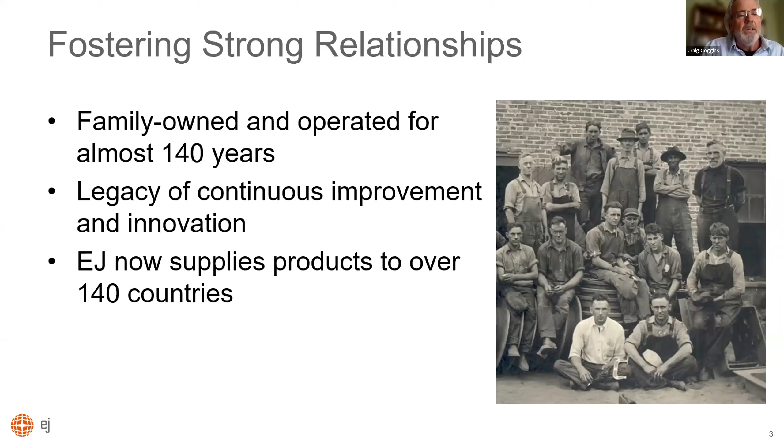Our new Syracuse fabrication plant, just north of Syracuse, is where Brian Stites' office is. They focus primarily on fabrication of aluminum access hatches and a lot of custom underground utility vaults for big utility customers. We really specialize in customization of those types of products. We also do a lot of steel frames and grates, depending on the state you're from. In Connecticut, for example, all your inlet structures are welded steel fabricated frames and grates. A lot of other states still have those requirements, so we do that type of work at the Syracuse fabrication plant too.

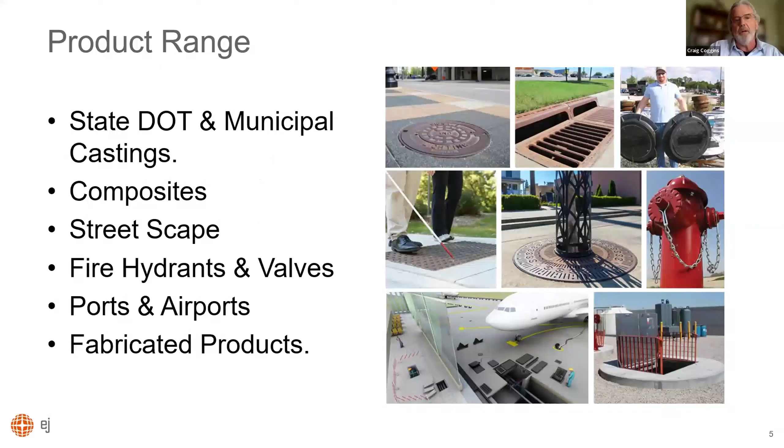Okay, so jumping right into it. Oops, let me go back here.

So the remainder of the presentation is going to be talking about innovative access solutions for municipal infrastructure. I think one of the things our leadership has done a pretty good job of is recognizing the importance of getting out there in the field with our customers and finding out what it's like to use the products that we make. In doing so, we've learned a lot. We start seeing where people struggle to use the types of things our industry produces. We see other kinds of applications out there that really need a solution rather than just a traditional manhole frame and cover. So these are the things we try to take back to our product development and come up with items to address those things.

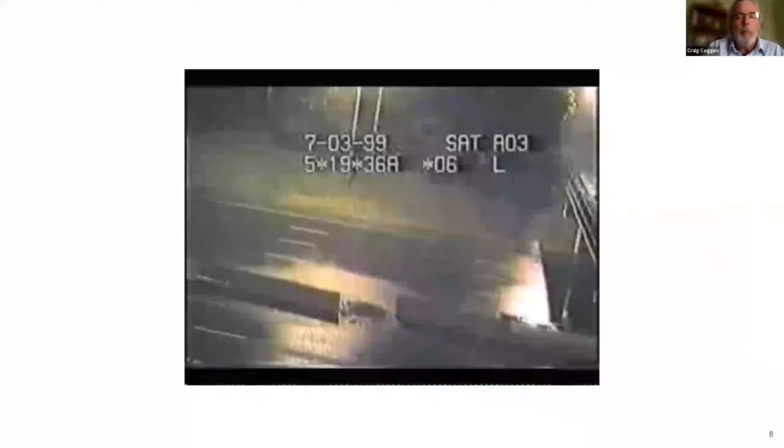Typically, whenever I start talking about this face to face with a municipality, I can usually catch one or two people in the room - they start shaking their head like they know exactly where they have the problem. So I should have clicked this a second ago while I was talking, but I wanted to...

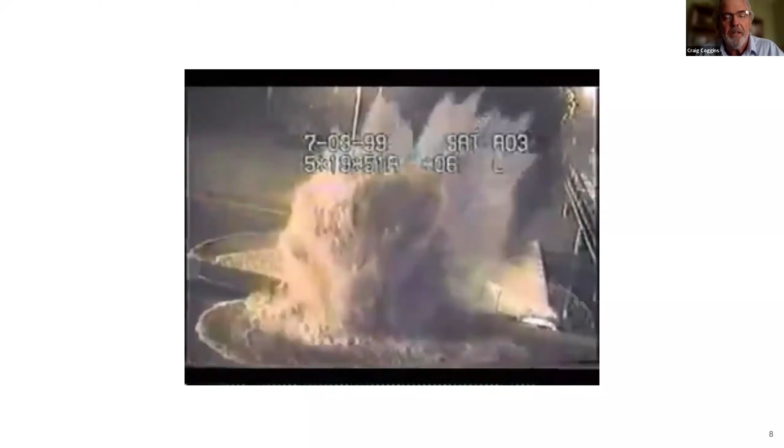give a good example here of what happens when you do have those types of events. You notice there's a manhole structure right there in the center of these four lanes. And this is what can happen.

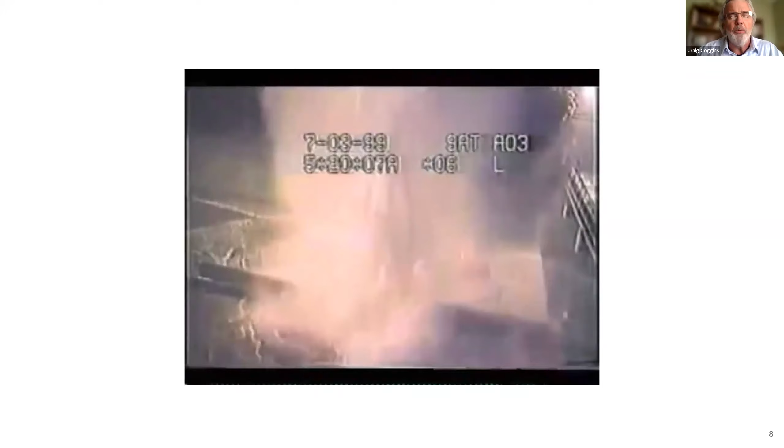And the reason I'm letting it go here is because I want you to see, laying right there in front of that pickup truck, you can get a sense of just how big that manhole cover is. I know we make some pretty large ones - just looking at that, I'm guessing it's probably like a 4-foot clear opening, so the manhole cover itself is probably 50, 52 inches in diameter.

And this video just keeps going because it's not done yet. This thing will erupt again shortly after the gentleman in the pickup truck gets out there, probably inspecting the damage, if anything, in the front of his truck.

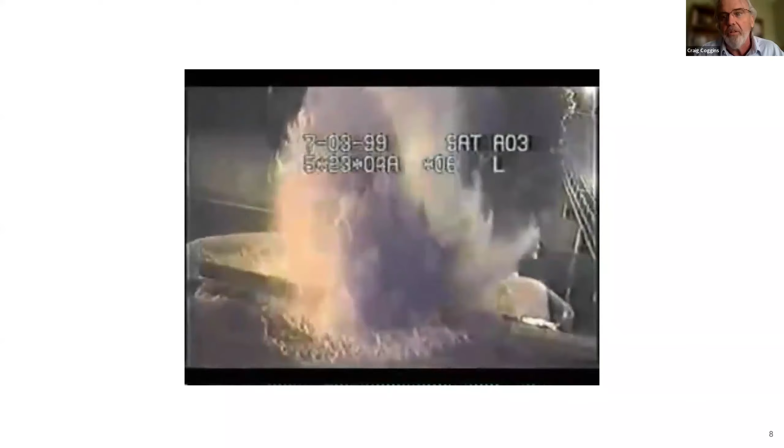Now, one thing I like to point out here - obviously this is a problem because now you've got a manhole cover right in the middle of one of the lanes. But thankfully in this scenario, the actual structure itself is located in between those two Jersey barriers.

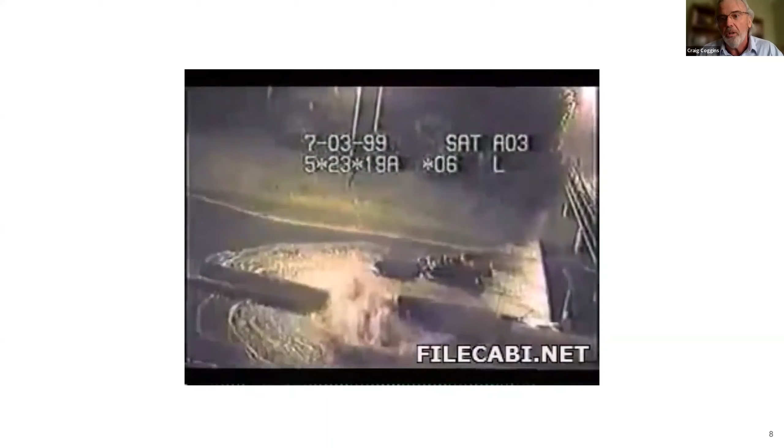Most cases, that's not what's going on. Those manholes are usually right in a wheel lane. You saw a tanker truck go down the road there a few seconds ago. You can imagine if you've got a 48-inch diameter gaping hole in the middle of your road and along comes a tanker truck, and he's not seeing that. So it is certainly a problem.

It doesn't take a whole lot of pressure. You'd be surprised what it takes to start to dislodge a manhole cover.

So then you've got the issue of an open hole in the middle of your roadway, which could cause vehicular damage, maybe some bodily injury or worse. So it could be a problem, not to mention the additional cost of now you've got to send a crew out there to locate the manhole cover and put it back in place.

So one of the things that we've developed for those specific applications is a storm surge assembly where you have a manhole cover anchored at the backside of the frame on a hinge point. And then you've got a large arm that hangs down into the structure. So if you do have that type of event which would typically dislodge a cover, it will push this cover open to, I think it's like 15 to 17 degrees.

It will allow that energy to dissipate. But then once that subsides, the cover is just going to shut right back down into the frame where it's supposed to be. So you're not left with a hole in the middle of the road, or other potential catastrophes there.

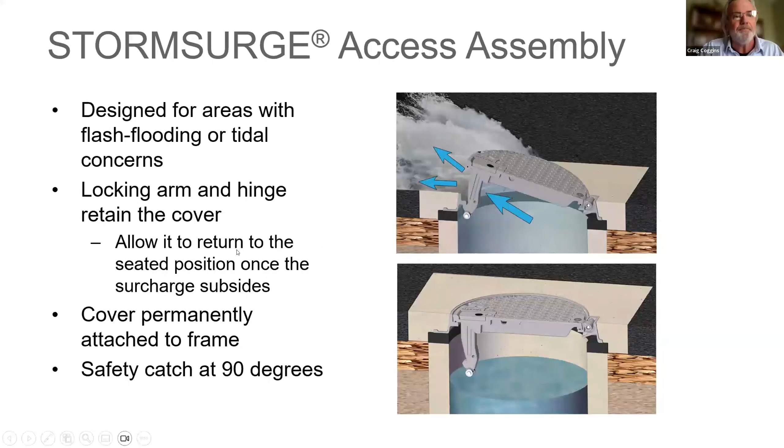So one of the things I like to do is, I get done showing one particular design that allows water out, and then I jump to something else where you don't want anything getting out or in. So we'll talk about watertight applications for a few minutes here.

And what our engineering group wanted to do was design something that would take a tremendous amount of internal pressure, because there are a lot of applications out there that could potentially be in floodplains. There's some low-lying areas, especially nowadays with potential effects of climate change. People along the coast are worried about it, a lot of the low-lying areas are starting to see more flooding.

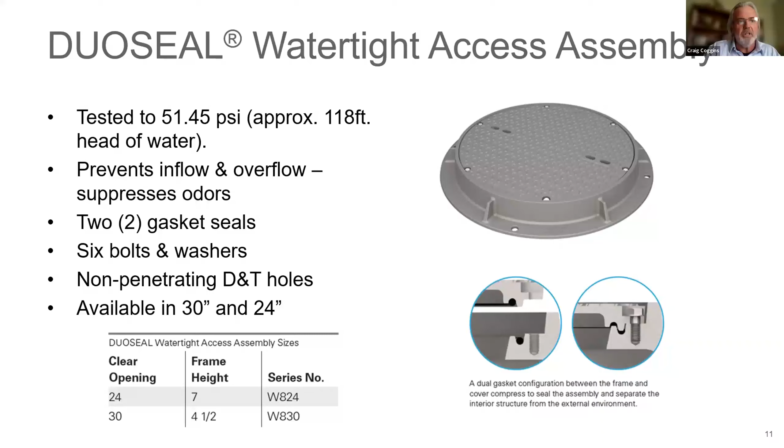So one of the things that we did, this is just an internal list, not an industry standard, but we wanted to be able to put a number to certain levels as we're having a conversation with an engineer, customer, or distributor about what exactly they're looking for. So they came up with these 8 levels of watertight. Level 1 is just a traditional gasketed manhole frame and cover, with a compressed gasket, either just the weight of the cover or a bolted cover. No testing has been done there, no pressure rating. So pretty much anything with a gasket and typically a bolted cover, we'll call that a level 1.

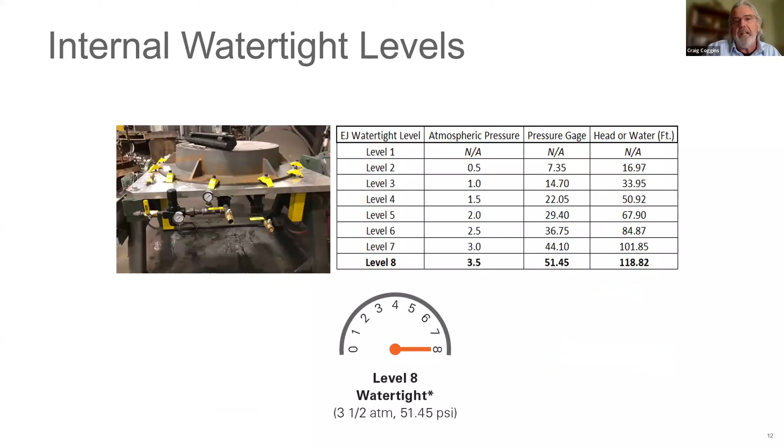So they wanted to develop something at the top of that list, and that's exactly what this Duo Seal is designed to withstand - that level 8, almost 51.5 PSI, which equates to a little over 118-foot head of water. That's quite extensive - I'm not sure when that's going to happen, maybe after all the polar ice caps melt - but the bottom line is we have something that will address pretty much any application that's out there.

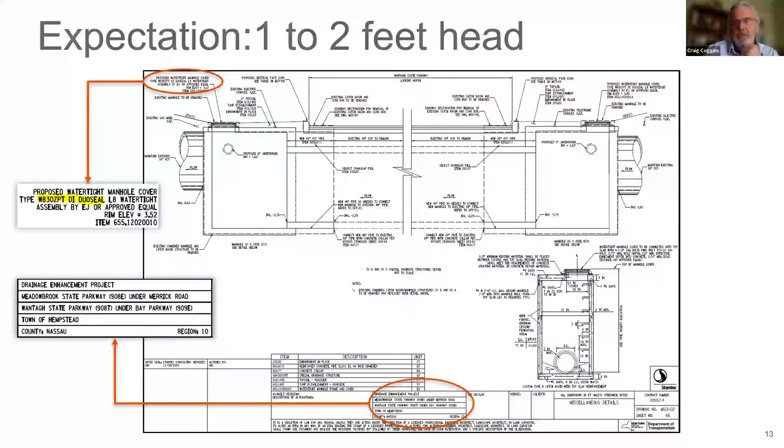This is just a picture real quick. I worked with an engineer out of New York City who specified this product on a job down in Region 10, on Long Island. We actually got a note back from that engineer asking if we can go through the process and get this DOT approved, because they anticipate a lot more applications like this, especially down there on Long Island, along the coast, and probably up along the FDR. I'm sure Hurricane Sandy is always going to be fresh in the minds of a lot of people out there for quite some time.

So I did submit that to the DOT. We do have New York State DOT approval on that particular item. One of the things I included - I worked with some industry partners over at ConSeal, because the question kept coming up: how do you seal this thing to the structure? So using a couple of their products, we put together this recommended specification for sealing the frame to the concrete structure, which is good for a maximum of 10 PSI pressure, equating to 23-foot head of water. And then I've got a note in there that anything beyond that, up to the design pressure of that Duo Seal, which is 51.5 PSI, an alternate method should be developed.

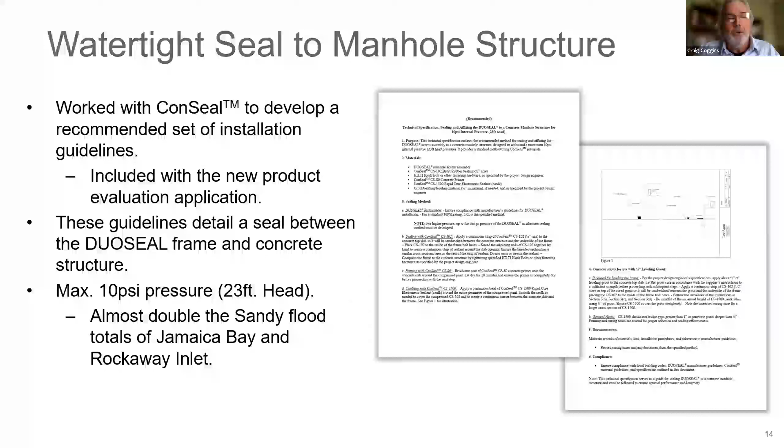But when are you going to need that? Like I said, this is good for 23-foot head of water. So just out of curiosity, I did some Googling - I've mentioned Hurricane Sandy a couple of times, and I wanted to know what were the worst hit municipalities during that catastrophe. As you can see, the bottom two there, Jamaica Bay and Rockaway Inlet, both saw almost 12 feet of water. That's a lot of water. But my point is, we've got an access assembly designed to take 118-foot head of water, and a recommended sealing method to the concrete structure good for almost twice what those two municipalities saw during Hurricane Sandy.

That is the whole spiel on the watertight side of it. I don't know if anybody had any questions so far - anything I need to stop to address? Are we doing okay? Nothing in the chat yet. Okay, alright, I'll just move on here.

Okay, continuing on talking about addressing products for resilient municipal infrastructure. We hear a lot of talk about sustainability nowadays. Every time I go to an APWA show or similar type of show, there's always a talk or presentation about different people trying to develop new asphalt systems, more sustainable asphalts. And one of the issues that could possibly help the sustainability of an asphalt road surface is your access points.

To the infrastructure. I would assume anybody with a driver's license can understand this picture. Depending on where you're at, your typical routes to and from work or the grocery store, you probably know which ones you're going to swerve around because it's just not good for your car. And this is a problem that has gone on for years and years.

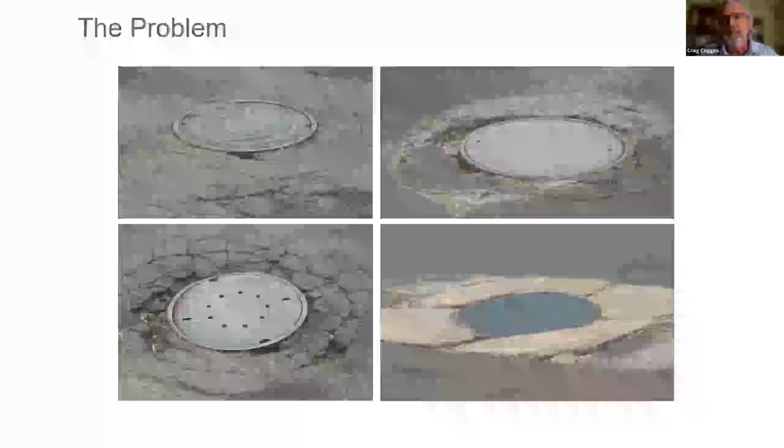If you think about what we've been doing for the past 100 or so, 120 years, wherever you have a manhole that you have to get into and you need an access point, historically we've taken a cast iron frame and cover and you set it on top of that structure, and then you pave up to it. Now you've got two separate entities: your cast iron access point in the middle of your road, and your paved road surface paved up to it. But once that casting is set, that's pretty much where it stays.

But then what happens when winter comes and temperature gets really cold? Your asphalt starts to move. You've got freeze-thaw cycles. That asphalt will heave and settle. But if that iron isn't moving, you can see what kind of problems typically start going on around that structure.

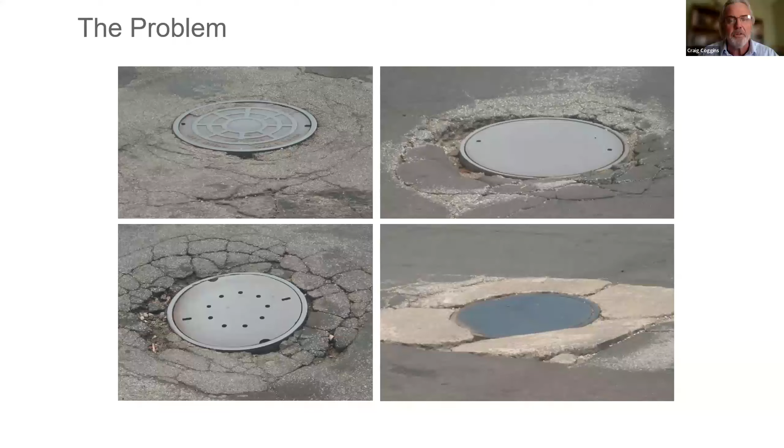So now you've got something to address the pitch of the road, the cross slope, and then the upper frame and cover actually gets embedded into the paved road surface. So now you've got your access point that's an integral part of your paved road surface. And when you do have those freeze-thaw cycles, that upper frame and cover, as part of your road, will move with it. And that will protect your road surface.

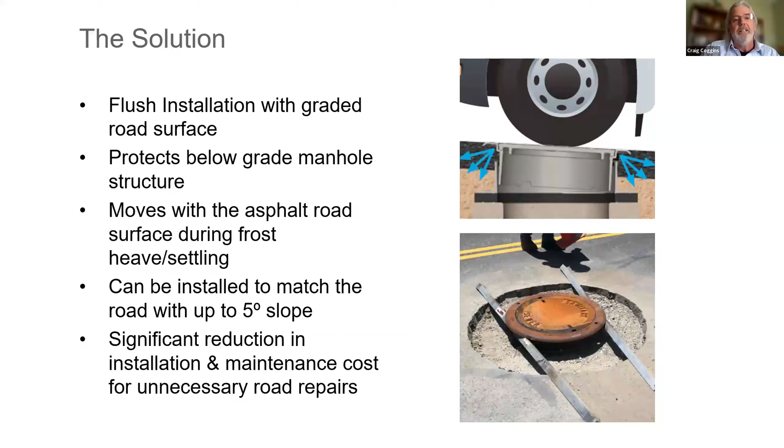So I'm just going to move on here because I've got a little video coming up. You'll get to hear a couple of municipal people from upstate New York talking about what they think about it. I could sit here and talk about the stuff all day long, but it's nice to hear what somebody else thinks about it that's been using it. So I'll just go ahead and jump to that.

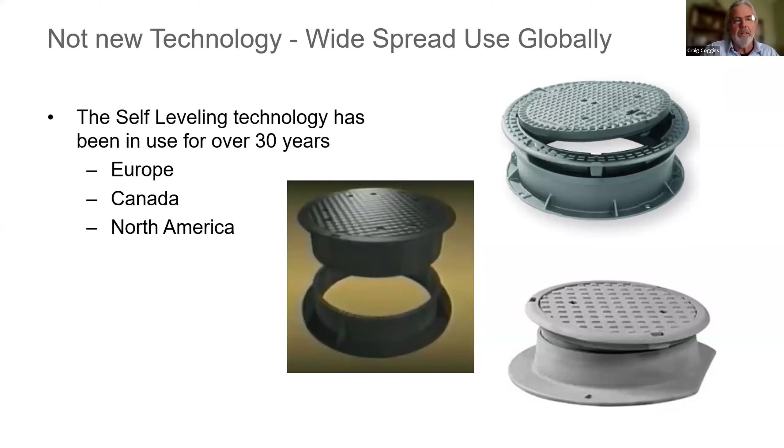I did want to mention though, it's not new technology. Not too many people want to be the first horse out of the gate with something new and fancy, but this type of technology has been around for quite a few years, used over in Europe quite a bit. This is pretty much all they use up in Canada, I believe. I think those two lower pictures are both Canadian units. The lower right picture is one that was typically used all through upstate New York, but it was sourced from Canada over the years. So probably the past 20 years or so, we've finally developed our own, and it's seen a lot of success.

Upgrade your streets with... sorry, I failed to give you more lead-in, but anyway, here's the video. I'll just let this play so you can get a better sense of what exactly it is, what it does, and some of the results there.

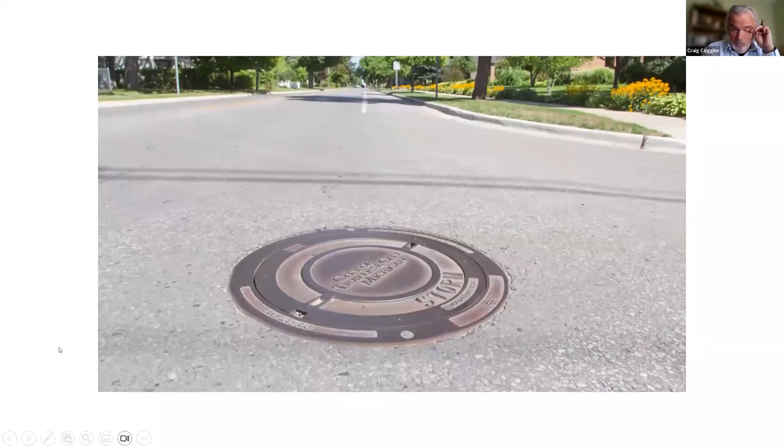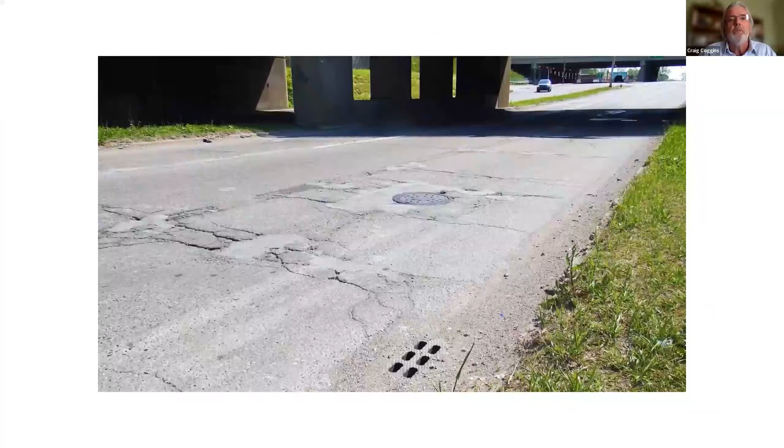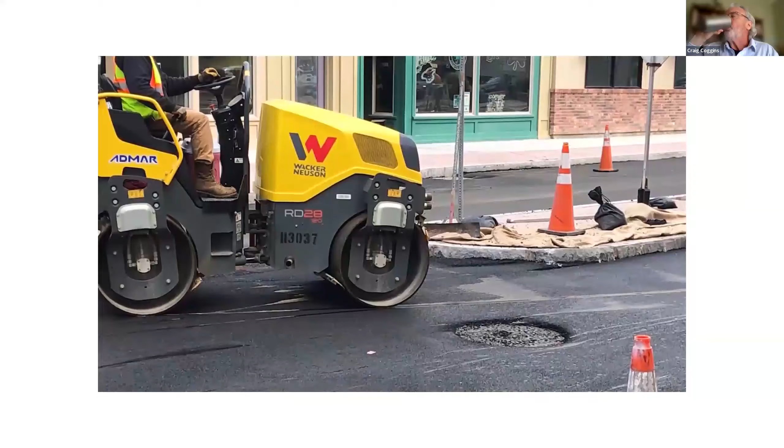The self-level access assembly, engineered to keep manholes flush with the pavement, so your roads stay smooth. If a manhole frame is not properly installed and adjusted, it can result in sunk and broken asphalt or concrete around the manhole. Traditional methods of resetting or replacing manhole assemblies can be costly due to labor, materials, and equipment. With the freeze-thaw cycles, we were getting deterioration of the asphalt in the surrounding area. It was very time-consuming to install the traditional manholes for repairs. Adjusted manholes might look good from the start, but could crumble if the frame is not properly supported. The mortar underneath them will give out from the salt water. The salt in wintertime gets in there and dissolves them, makes them tilt, and they sink in the ground.

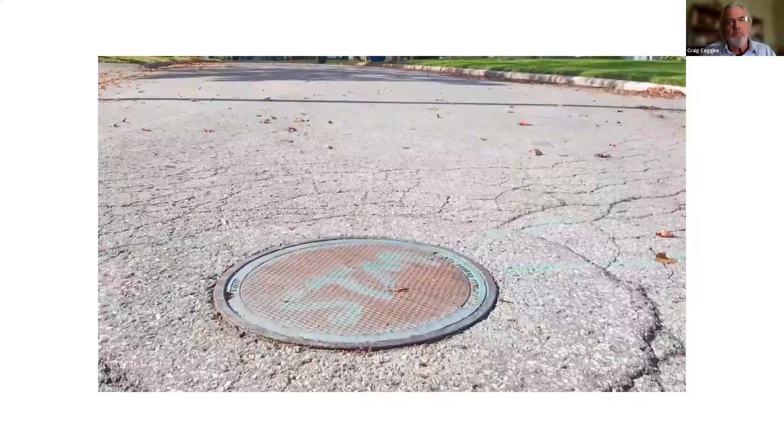The self-level access assembly reduces site deterioration around manholes caused by frost heave, uplift, and settling, which improves drivability to meet smooth street initiatives. The two-frame assembly moves to remain perfectly aligned with the finished road surface.

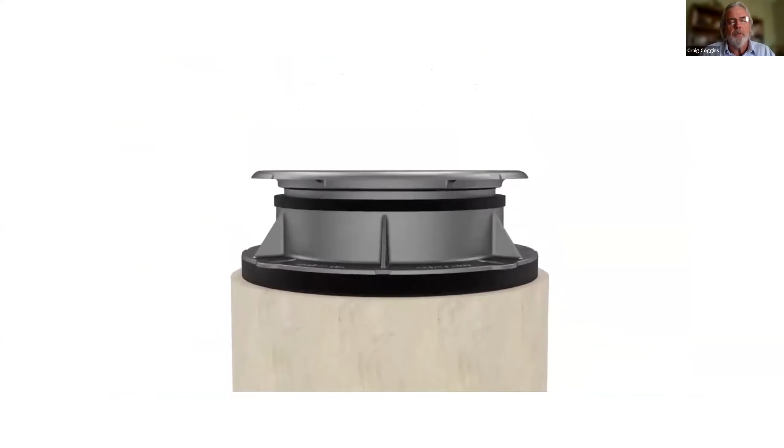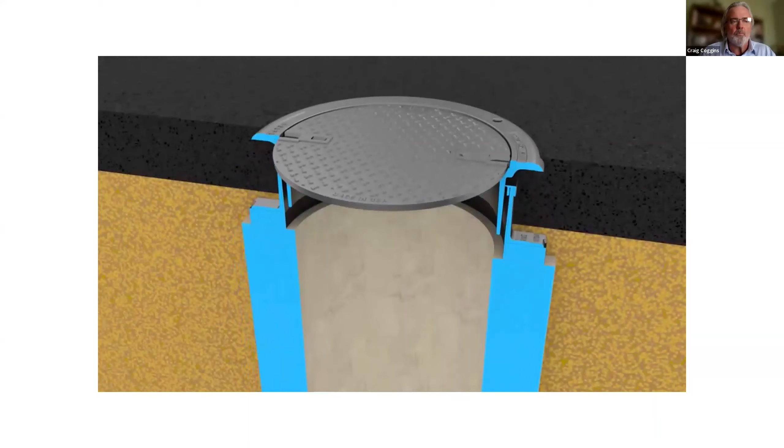It features a guide frame that facilitates self-centering and keeps the upper frame centered over the manhole structure. The upper frame is supported by and moves with the road surface. This floating effect helps prevent road damage and protects the infrastructure underground by dispersing traffic vibrations and shock throughout the road surface, rather than into the structure below.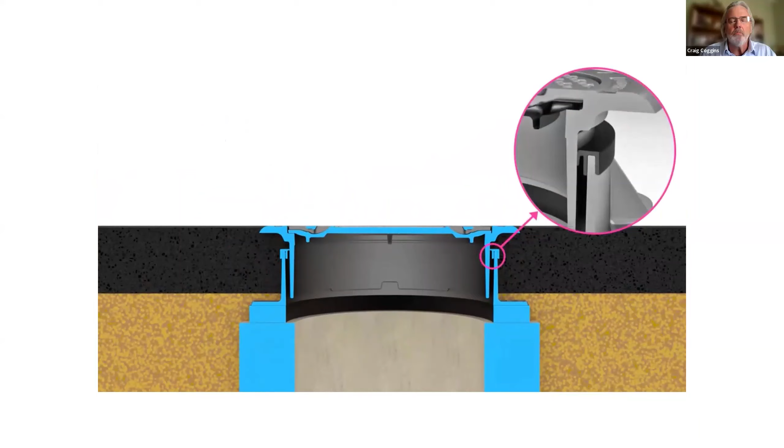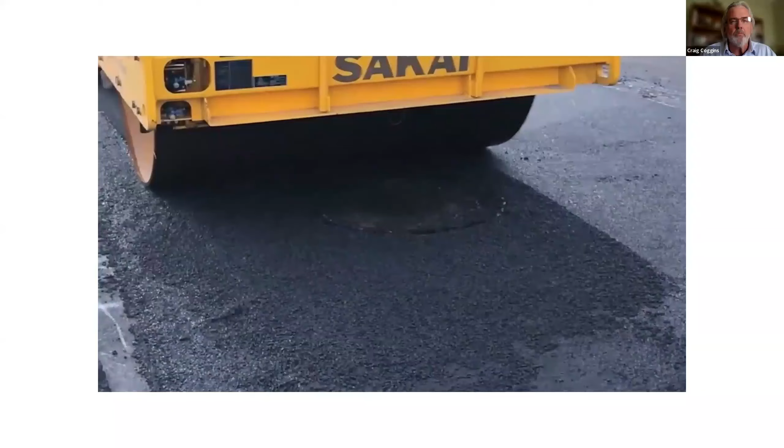The multifunctional seal helps keep the upper frame centered with the guide frame and reduces water infiltration. During installation, the bottom guide frame is set, and then the upper frame is set and adjusted as asphalt is laid and packed underneath it. This product saves contractors time because it eliminates the need to go back to reset manholes.

What I like about the self-levelers, which I've touched upon a couple times, is the ease of installation. They go in fast. We can basically prep a half a dozen manholes in a given area and go back through and install these within a matter of hours. The assembly has a range of motion of up to a 5-degree tip angle while still moving with the road.

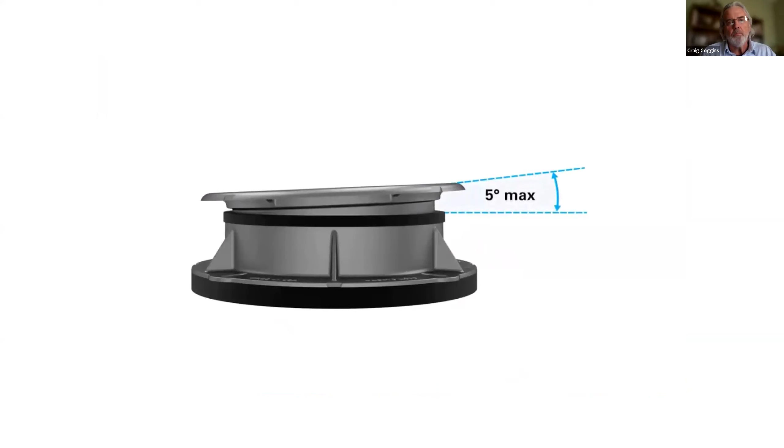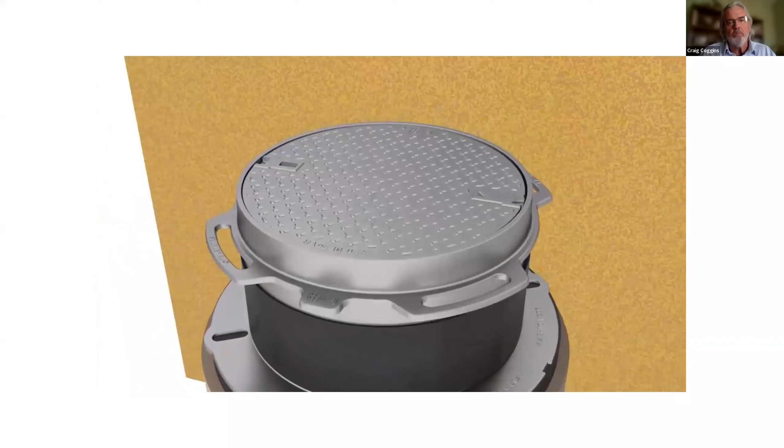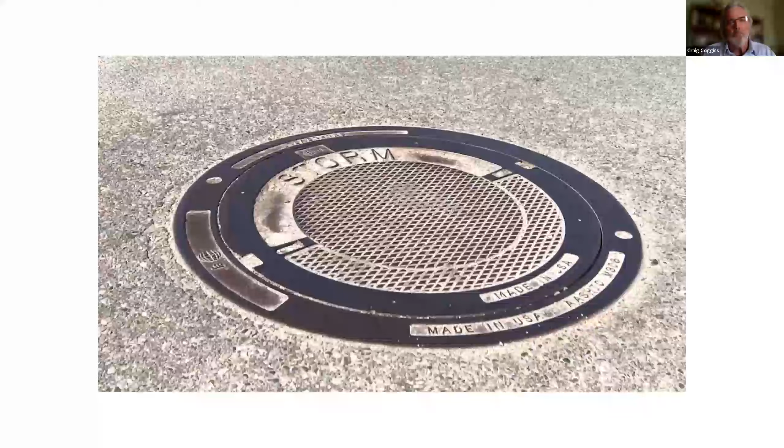The self-level access assembly can also be used for retrofit applications. The concrete version includes a steel sleeve and adjustment brackets to help facilitate installation. Existing manhole covers are interchangeable with the self-level access assembly. Multiple frame openings and heights with varying minimum and maximum ranges of movement are available, as well as special lettering, custom logos, and security bolting.

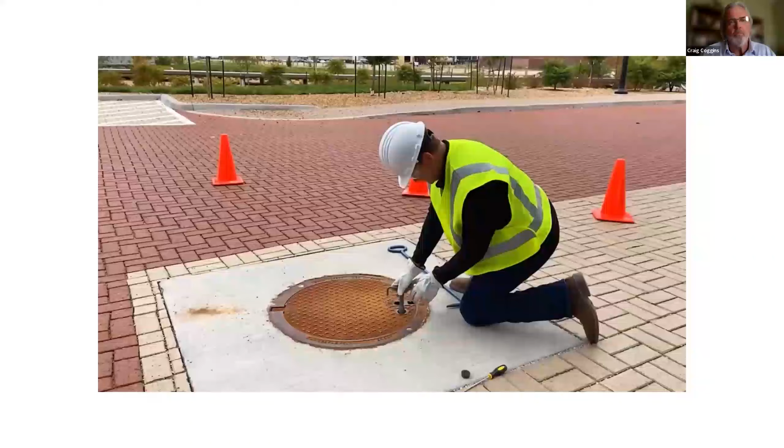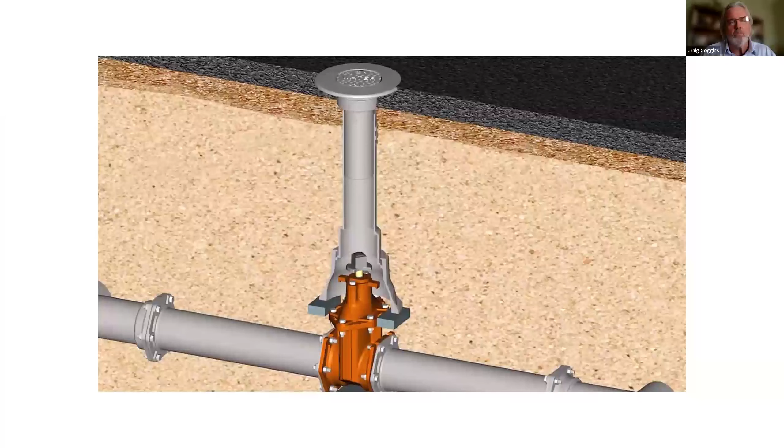The Ergo Self-Level combines the ergonomic and security benefits of the hinge cover with the roadway leveling benefits of the self-level frame. A self-level valve box riser is also available.

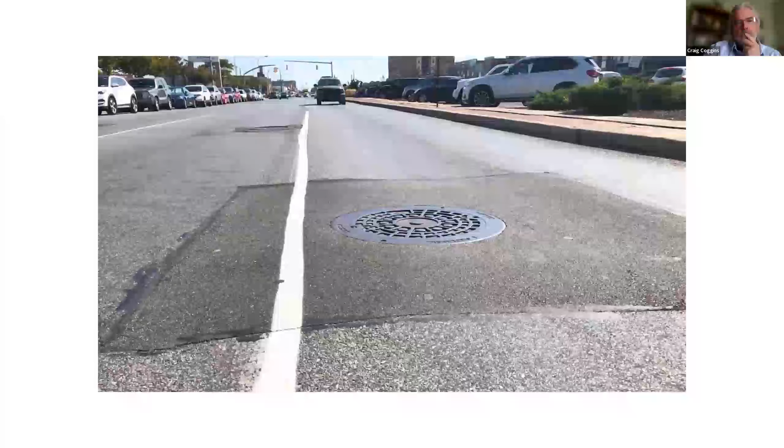As these units are more of a set it and forget it type unit, I would say it's cut down on us having to patch or revisit areas that we've already made repairs in. Nothing to do after you install them, you know. I mean, once they're in, they're good. That comes out with the road perfectly. I would definitely support other communities looking into this avenue for, you know, either when you're paving or doing repairs and retrofitting on streets. Choose a self-level access assembly to improve drivability and reduce your maintenance costs.

All right, so, like I said, the video does a really good job of explaining what it is and what it does. We do have some approvals: PennDOT, New York State DOT, and Florida several years ago included it in their standard sheet for their manhole assemblies.

North Dakota DOT - the video mentioned the concrete version. North Dakota has a lot of concrete roadways, I think largely due to the heavy truck traffic from the oil and gas industry out there, so they specified the concrete version. Maine Department of Transportation has approved its use under special provision, and I'm currently working on some of the other DOTs. It's an item that really does exactly what it's designed to do, and a lot of users are really appreciating the benefits that they're getting from it.

I'll just roll through just a couple of slides. Like I said, the video did a pretty good job, but I just want to give a couple more examples, just getting to actually see it a few years down the road, and the results kind of really drive it home.

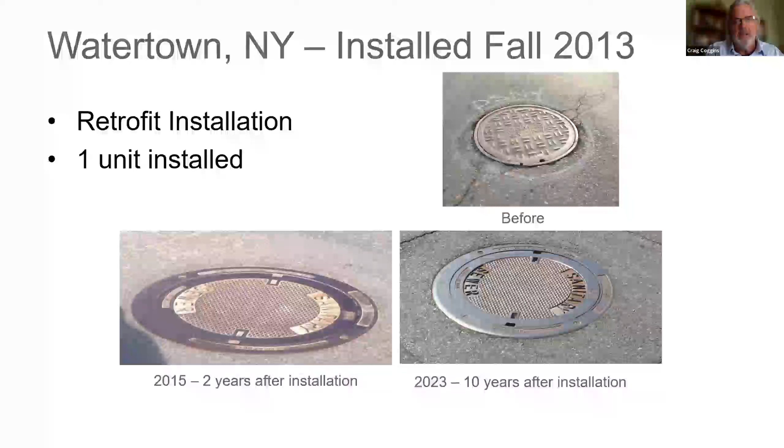Watertown, New York - first installation we did was back in 2013. You can see in the upper right the unit that was taken out of there to put the self-level in. Then in 2015, the lower left, that's just 2 years after installation. And then just last year, that's what it looks like - still looks that good today. So they watched it for a few years and they were really impressed, and now they've come back and started buying a lot more of them.

Baldwinsville, New York is a great story. I think they put in about 50 or so of the self-level units.

But you can see the other unit there in the back of that picture is a Verizon unit. So Verizon was taking care of their own structures, either setting new traditional frames and covers or resetting what was there, with basically the same result that you saw on my first slide in this section. Even right after the project was newly completed, you could see there - and I've been out on job sites, I know the contractors are trying to do the best job that they can to match the pitch and the cross slope of the roadway and get it flush.

You have to worry about all of that first before you pave up to it. But it is still a challenge. Every road surface is not flat, so they have to do what they can to try and match that. But you can see right in front of there, the difference between a self-level installation.

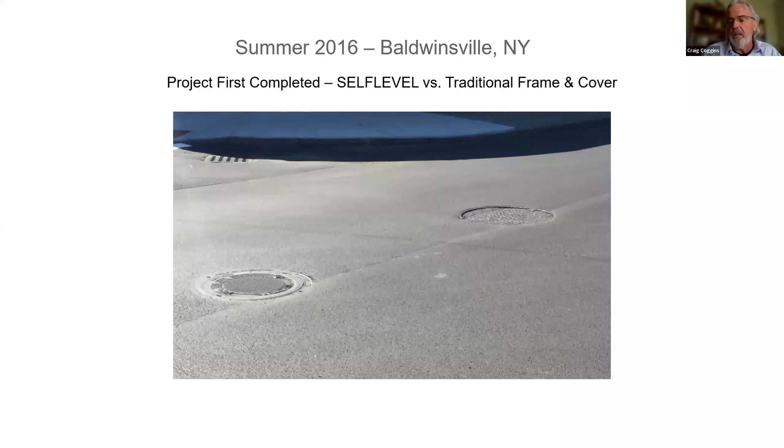This project was completed in 2016. This is the same project, my little Zoom menu bar across the top there, I think the date was 2018. So the top two pictures are just a couple of years after they were installed. On the left, there's a self-level. On the right is a Verizon unit. Then the bottom picture, in 2021, same two manhole structures.

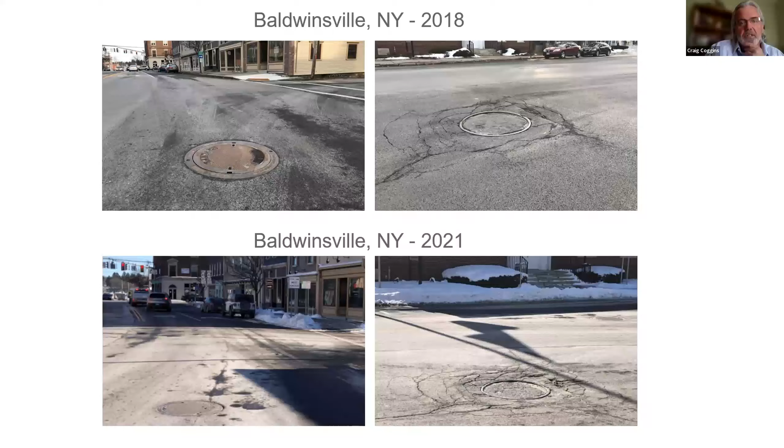So we're looking at 6-7 years after installation. More recently, just back in September, October, I took these pictures here. Same two structures, but I ran across the street to get both views. Again, the project was completed back in 2016. Both of these manhole castings were installed the same day.

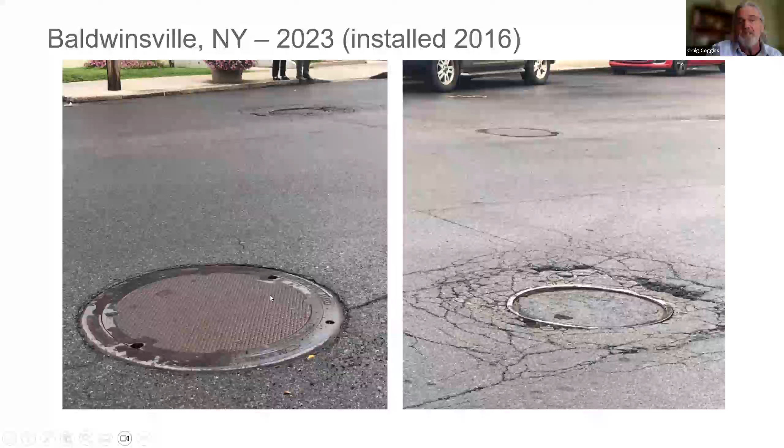You can see the difference between the self-level unit, which basically becomes part of your road surface, versus a traditional manhole frame and cover. So the proof is in the pudding, like they say.

And lastly, in case nobody's asked yet, the question typically comes up because they see an extra frame - what's the cost? They are more expensive. We could address that more specifically if somebody has that question, but we do another presentation for the state of New York for PDH credit that just talks about this particular item. We have a whole section that goes through all the stories of the different municipalities that are using them. And I notice it's the same story every time.

The first slide shows, they start off with 1 or 2 or 3. In the case of Elmira in New York, in 2015, they decided okay, we'll try them. They bought 7 of them. We helped them put them in. They were happy with the result.

So the following year they came back, they bought another 30. We offered to help again, and they said it's pretty straightforward once they figure it out.

And that's the other thing that a lot of the feedback we get is they feel like they're saving money right up front, because they realize it's kind of counterintuitive, even though there's an extra piece there. They're realizing that once they get this down pat, the installation is about half the time as a traditional frame and cover, because you don't have to mess around with trying to get it precisely to grade. You just get it close and then let the asphalt and the rolling machine do the rest.

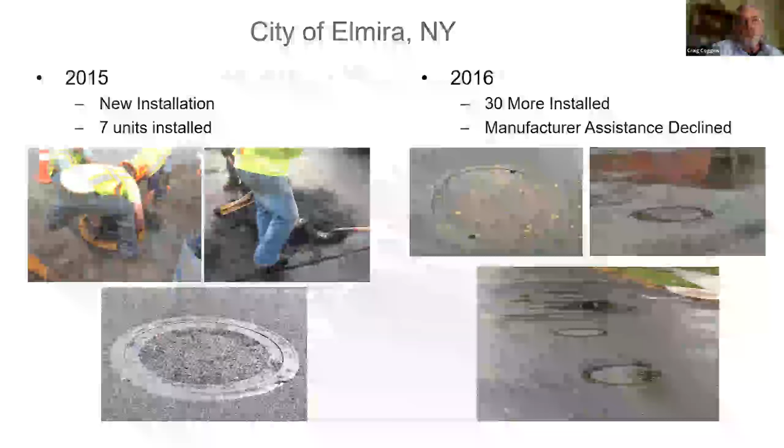And then the following year, they came back and bought another truckload. So I believe this is all that they're using now in the city of Elmira. And there's a lot of other municipalities - it's pretty much the same story.

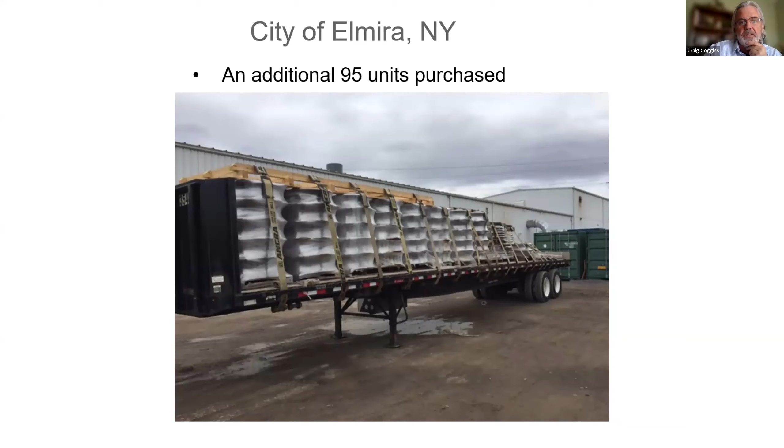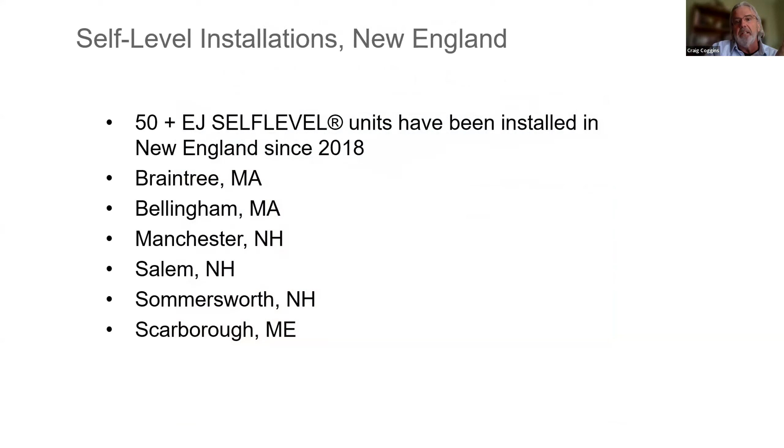New England, since we're at the New England chapter of APWA, I figured I'd just throw this up here. We are having some success in New England, looking at trying to get some DOT approvals up there. I mentioned Maine earlier. We are seeing a lot of success with this particular product. It's definitely saving a lot of money, helping with the sustainability of the road surface quite a bit.

All right, with that, we're going to move on to the next section.

Any questions so far? I had to say that so I can get a drink of water real quick.

All right, we mentioned different materials. We've been around for a lot of years. We started off as a foundry. We love iron, but we also understand that other materials may be better suited for the particular application. So we do manufacture composite manhole frames and covers in Muskegon, Michigan. That's just a picture of the plant there.

Some of the advantages of composite products: safety and ergonomics - that's a big one. Reduction in work-related injuries, reduction in labor cost. You only need one worker to remove a cover. If anybody's been out there in the field, they have to take a big, heavy iron cover off that's been in for a few years - it takes a little bit of work.

That picture is a great illustration there. We did a little product demo down around Allentown, Pennsylvania, a year or so back, and this was one of the municipal engineers. She was just so impressed on how light a manhole cover can weigh, so she had her colleague take that picture there.

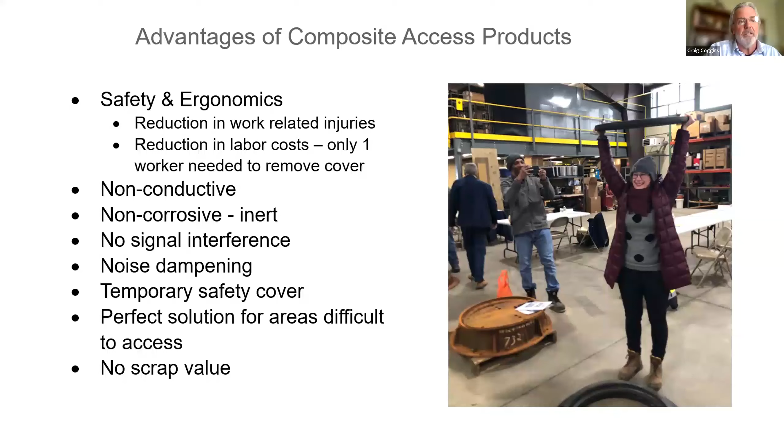I mentioned the traffic rating. Our heavy duty composite covers are rated H25. We use the AASHTO M306 proof load test standard. Beyond that, they're fatigue tested using a 16,000 pound load for 2 million cycles. It takes about 29 or 30 days to do that test, but they are tested for fatigue, and after that test there's no sign of cracks or any problems like that.

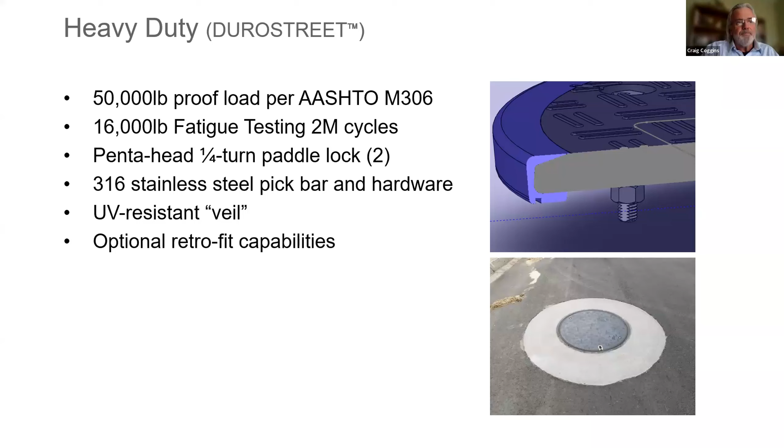We have different locking options available. Let's see what else—let me make sure I don't run out of time here. I've just got a couple minutes left.

One of the things we're seeing a big need for is retrofit covers. As we're presenting this product, we're getting a lot of questions. People are starting to think about different locations where these could come in handy, whether it's ergonomics, easy access, or whatever. They start asking, can we just put these in an existing frame instead of ripping out the entire structure? And in a lot of cases, we can do that.

I mentioned New York DOT—we have a composite cover that fits that frame. I know we're in a venue here with Connecticut, and I found out recently we do have a composite cover that will fit the new Connecticut DOT standard, the 38-inch cover. So this is another benefit people are seeing with composites, being able to retrofit into an existing frame.

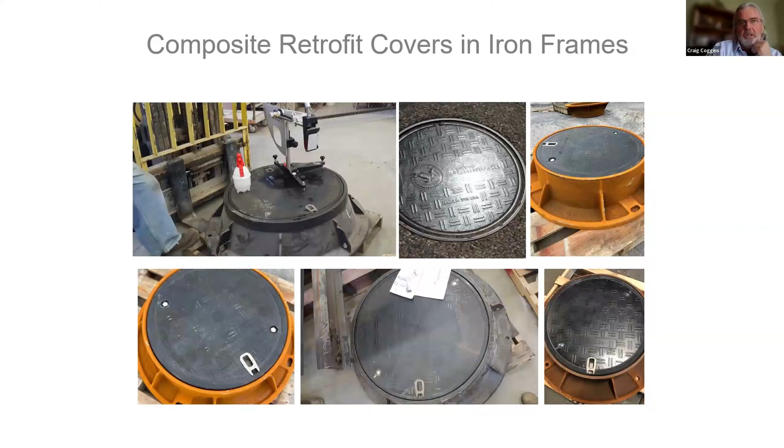Let me see, I may not have time for this video. But where I showed you earlier on our website, if you go into that third tab over under Resource Center, go to videos, you'll find this video, how it's made.

So that's a big difference with composite frames and covers—if this meets a lot of needs for your municipality, or if you're an engineer designing something for somebody, one of the things you want to think about is that composite is kind of a generic term. Who's making it, how's it made, what loading requirements does it meet, what fatigue resistance will it withstand—a lot of this comes down to how it's specified.

Let me jump past this and just conclude with the last section real quick. If we have time we can play it, but if not, like I said, that video is available on our website.

Okay, 11:48, I've got to land this ship here pretty quick. Detectable warning plates—I just want to talk about this real quick, I'll make this real short.

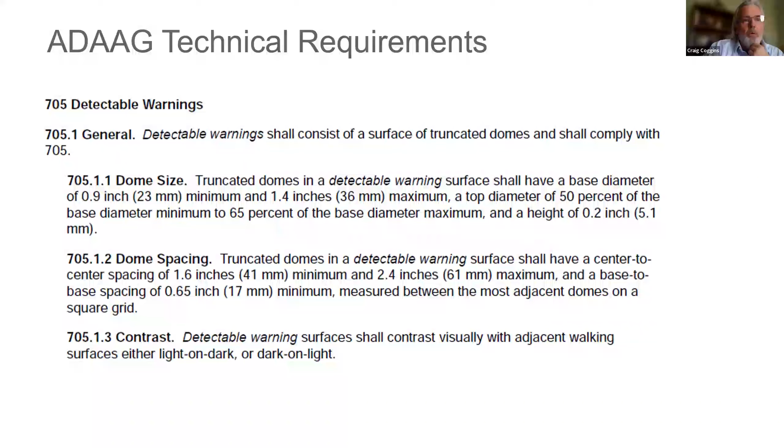The bottom line is, I mentioned AASHTO M306 a couple of times. That's the standard specification for drainage, sewer, utility, and related castings. That's the guideline that pretty much our entire industry follows whenever we're designing and producing our castings. Whenever you look through the ADAAG requirements or the PROWAG technical requirements, it's the same definitions in terms of exactly what a detectable warning is.

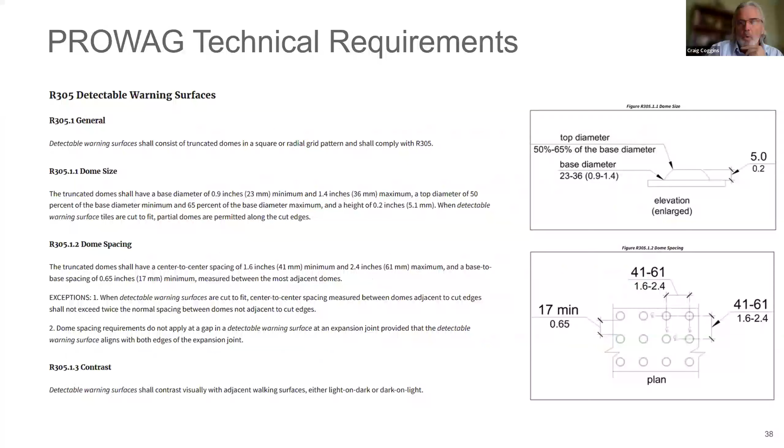They're defined primarily by three things: dome size, dome spacing, and contrast requirements. There's some other particulars too, like where to place them. But as you go through those standards, there's really no performance guidelines, no material requirements. That's why if you look at a lot of the state DOT approved materials lists, you go to the detectable warning section and you'll have a whole bunch of choices, because all the manufacturer has to do is adhere to the ADA guidelines—right dome size, shape, spacing, contrast requirements—and then pretty much you're good to go. You're ADA compliant off the shelf.

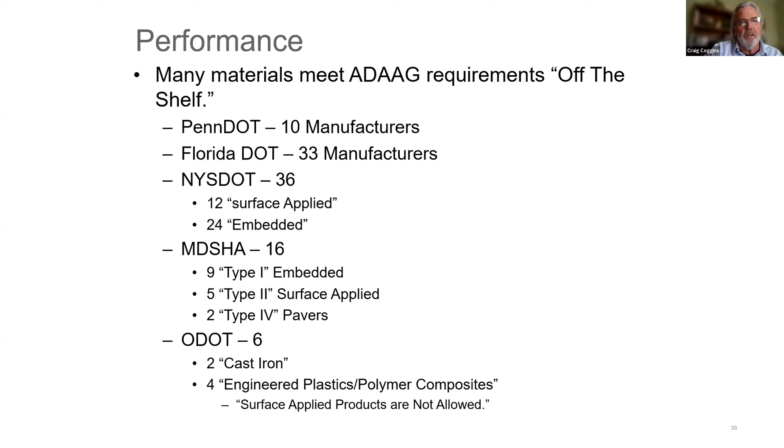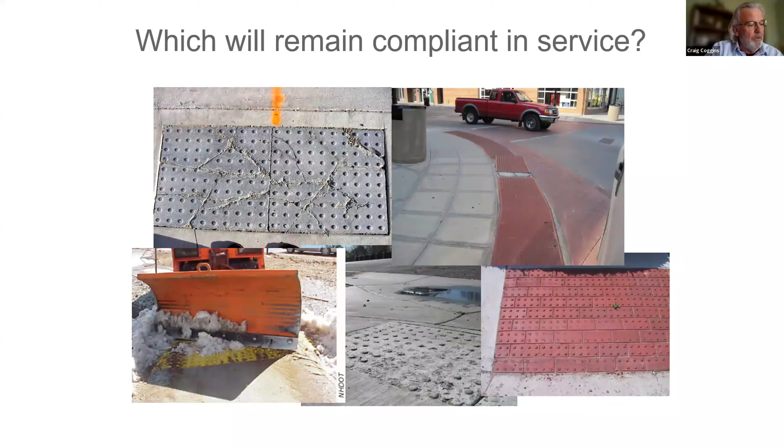But then what happens when you put them in the ground? Depending on the material, it can become an issue. So you kind of get the point here. I think we're coming to the end, so I'm just going to click through to get to the bottom line.

So the bottom line is, because of the ADA requirements, there's a lot of different materials and producers that have something available. Obviously at EJ we have a cast iron detectable warning system available—we're not the only ones, there's others in our industry that also make iron. That's the whole point I'm getting at: there's really no performance guidelines, no material specification in the ADA requirements.

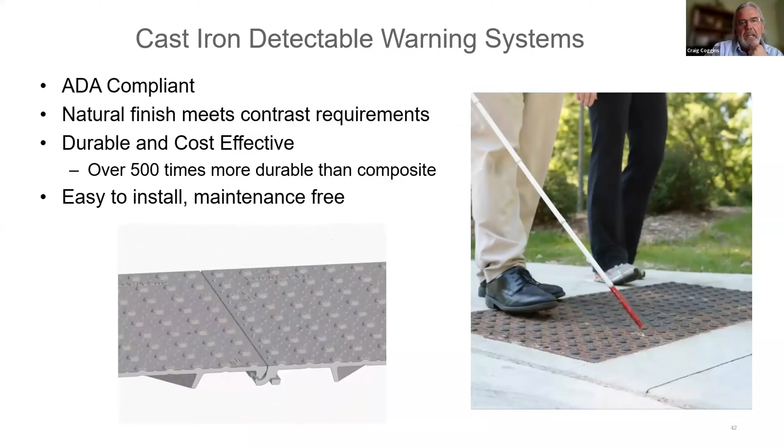So just to give you some examples—who addresses performance? It basically comes down to the owner, or whoever's specifying it. Going up in New England, where they get a lot of snow plows, a lot of these states have really looked into this, and some have done their own studies. New Hampshire DOT has a study out, Vermont has a study out, and some others too, all determining the same thing: there's a lot of materials out there, but what do we want to put in our roadways? It isn't cheap to install a curb ramp, so we want to make sure whatever material we use, we're not going to find out six months after a snowplow hit it that we're now out of compliance because we've got half the domes missing.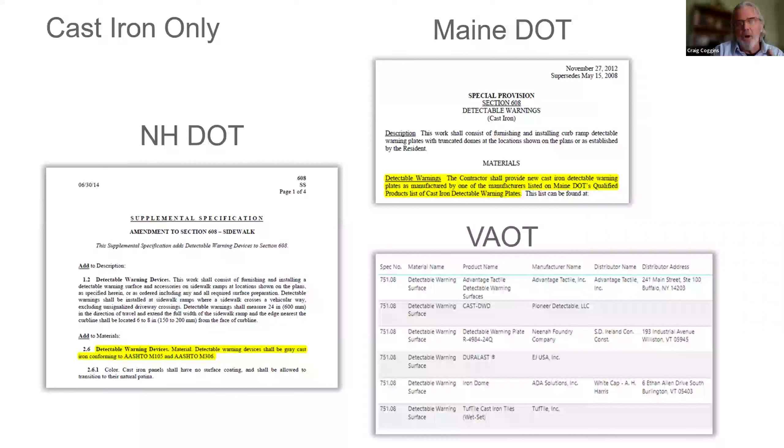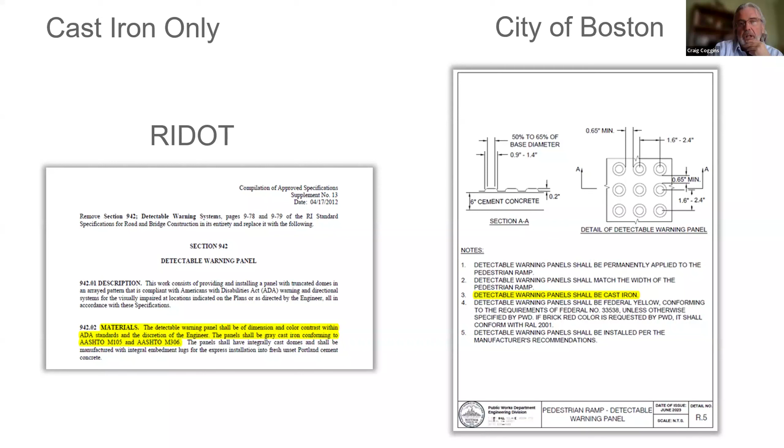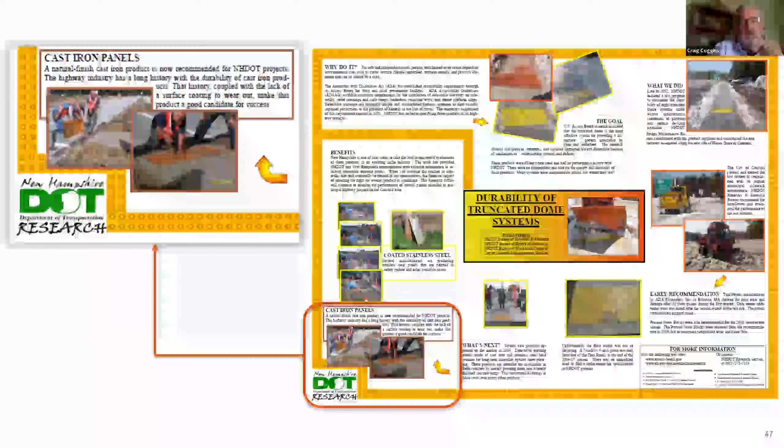So New Hampshire DOT—I believe that's Maine up there on my banner—Vermont, they're all cast iron only. Rhode Island DOT is cast iron only. More recently, the city of Boston, Massachusetts is cast iron only. We've had some initial conversations with MassDOT—I think they're currently going through their details and updating them. I'm not sure what direction they'll go, but they're aware of all this. One of the questions they had was... let's see, I'll skip that. But anyway, it's something they're looking into.

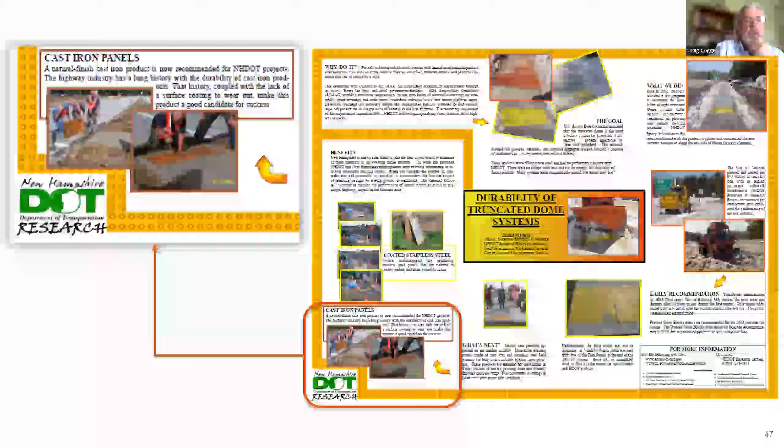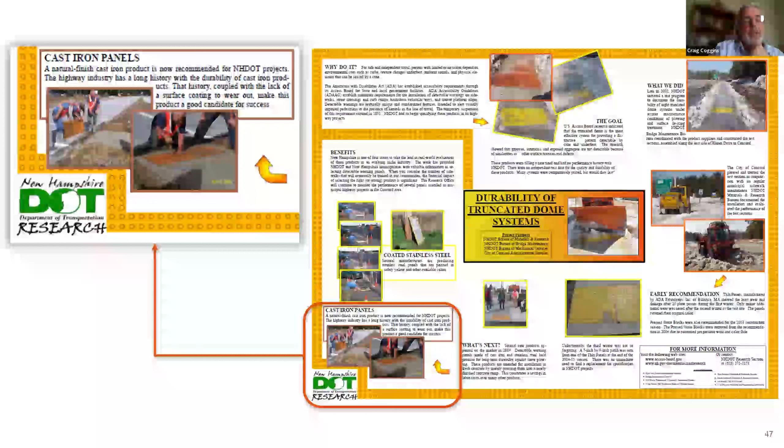Here's a little poster New Hampshire DOT put out after their study, with a lot of information about the different materials and their durability or lack thereof. But the bottom line, as you can see in the lower left of this poster on cast iron panels, is that a natural finished cast iron product is now recommended—wait, actually it says the highway industry has a long history with cast iron products, and that history, coupled with the lack of a surface coating to wear out, makes this product a good candidate for success. So that's the whole point: whenever you're putting products in the ground in your municipality, you want them to perform, and usually whatever it is has to conform to some sort of performance standard. If that doesn't exist in the ADA guidelines, it really comes down to the owner or specifier to look at what's out there. That's really how you address performance and longevity of these products in your curb ramps.

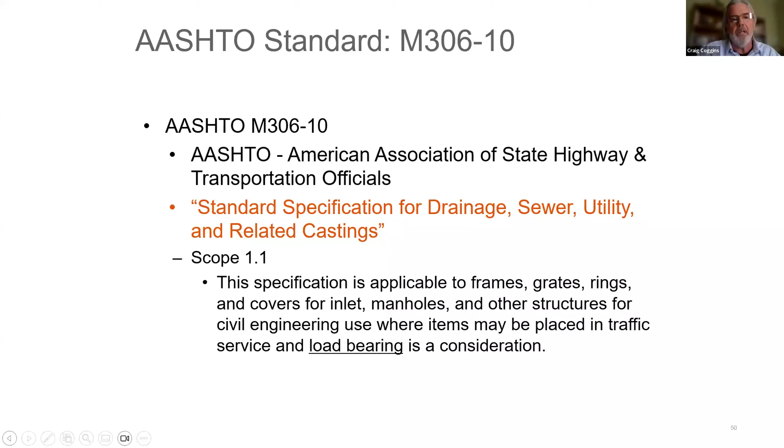So like I said, we conform to AASHTO M306, which is a standard specification for drainage, sewer, utility, and related castings. Sorry, I don't know how I'm going backwards again, clicking the wrong button.

So here's a good example, and I'm starting to see where the specs are updated. Their standards, for the most part, say something to this effect: all gray and ductile iron castings must conform to AASHTO M306-10. For the most part, that's pretty much all you need. A lot of them will go on and add other details, which is really covered by AASHTO M306.

As you go through this standard, a lot of the legacy specs require conformance to ASTM A48, wanting either class 30 or class 35 gray iron. Well, this ASTM A48 is part of the requirements of AASHTO M306, and they specify class 35 gray iron. Same with AASHTO M105 - that's just AASHTO's version of the ASTM A48.

And then the ASTM A536 standard spec for ductile iron castings - all of those are incorporated within AASHTO M306. So it's a very simple way to update those standards.

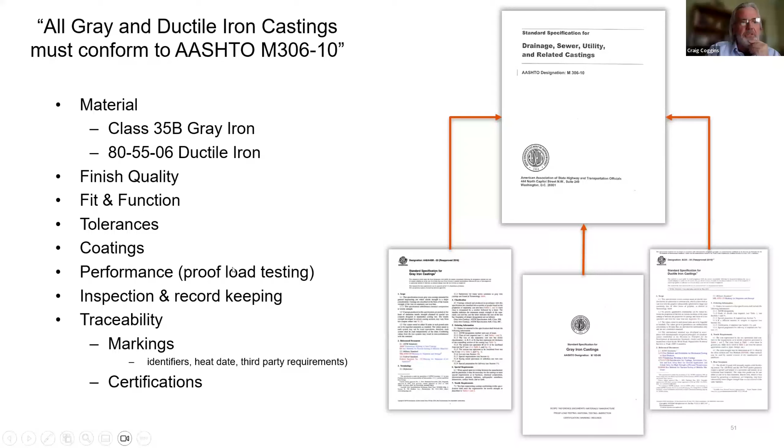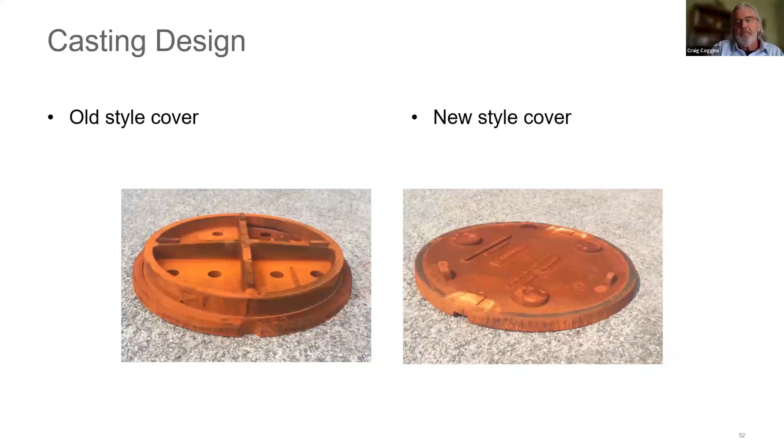I think we're pretty much out of time, but there are a lot of reasons for that - manufacturing castings better, going back to ergonomics, environmental responsibility, saving time off of work for back injuries. There are better ways to make castings.

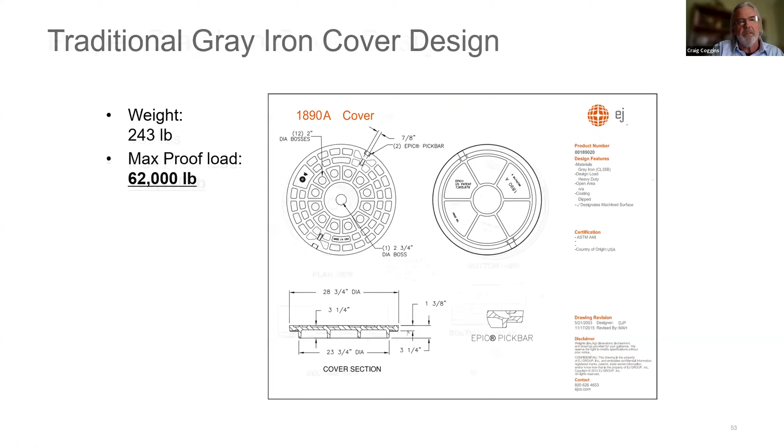I'll give one example here. This is an old style Western Pennsylvania standard that used to weigh 243 pounds and maxed out on a proof load test at 62,000 pounds. Now we make it and it only weighs 168 pounds, so it's a lot easier to handle, but it takes another 40,000 pounds or so to break that cover.

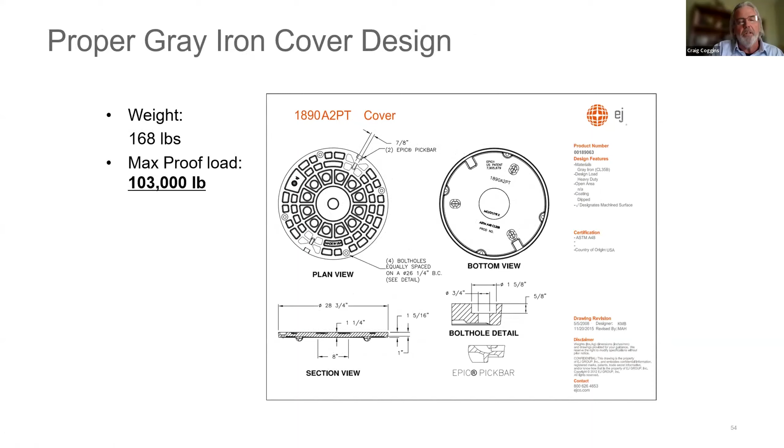There are a lot of other examples I can give you, but stackability with frames - they nest in them. There's a lot more you can fit on a truck, which reduces carbon emissions with a lot less transportation.